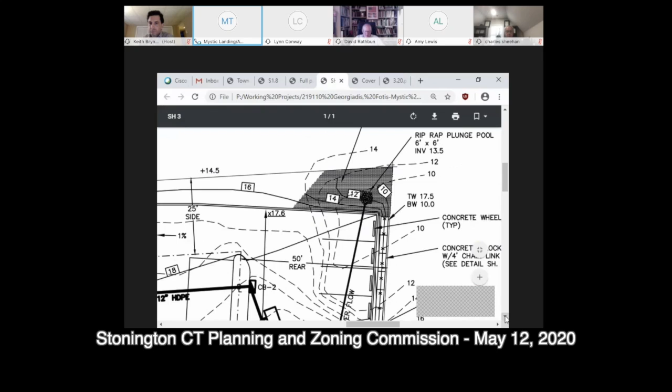A few other things I want to note about this plan is that you see there's a lot of drainage, underground drainage in different areas. All the rectangular and square areas, those are all underground drainage features. It's important to note that because when we move to our proposed plan, you will see that we've consolidated and I think have made significant improvements on the stormwater management for the site.

Furthermore, in front of the building, there was some low points where the previous plan was catching, you can see CB4 and CB5. Those are areas that we were catching stormwater in front of the building, which was not an ideal place to be consolidating water right in front of a building. Just something to note on that.

And then if you go to the left side, there's another catch basin existing that we were utilizing for an overflow, but also was catching some of the stormwater coming off of the site, which included some of the paved area in that vicinity that was not reaching any of the treatment areas for the water quality and the water quantity. So I wanted to start with this plan, and also point out that the grading on this plan was...

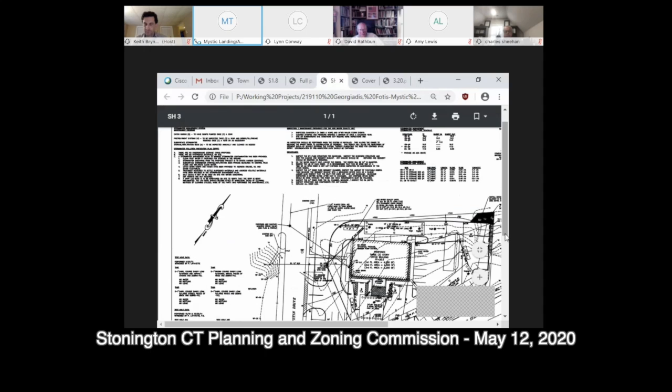A little erratic. There's a lot of steep areas, upwards of 8% along here, and I think the impetus of that was they were trying to meet the grade at Masons Island Road. As many of you know, that's much higher, or relatively higher than the site itself. The site kind of grades down as you go along Harry Austin Drive, which was a lot of the challenge in making the grading on this site work.

All of this stuff likely would have been picked up at final plan review by the town engineer. But when we first looked at this project, we went back to the old plan and said, what are the things that we need to change that can hopefully be improvements to the site?

So with that, I wanted to bring you to the new building. Generally in the same location, but I'm going to walk you through some of the changes that we made, which we feel are improvements to the site for constructability and cost effectiveness, and just general overall site improvements.

Just for the record, the project is for the construction of a 4,250 square foot, 3-story structure, 4,250 square feet in footprint. The proposed building as now is a mix of medical clinic, office space, and general office space with some common elements in foyer areas.

What we have done on this site, generally the layout is the same. We're still coming in the same general area on Harry Austin Drive. The vehicles can come across the front of the building where there's parking available, and there's also parking available to the northeast. The drive goes all the way around the building, and it's all two-way traffic with the exception of around the back, where it's only one-way traffic.

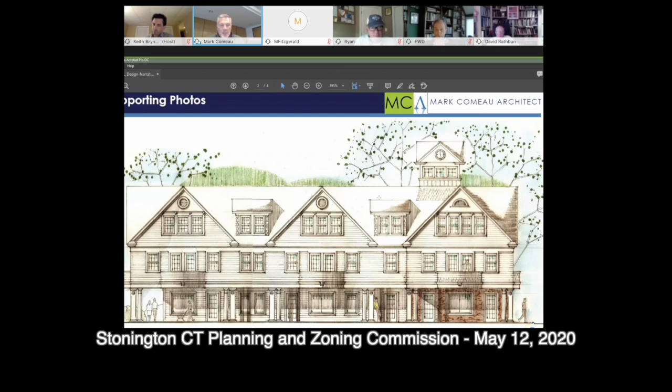I'd point out that all along the building has never maximized its FAR, and never maximized its height, which is something most clients demand of us. It was really good to be working on a project where the architecture was actually allowed to lead the way on that.

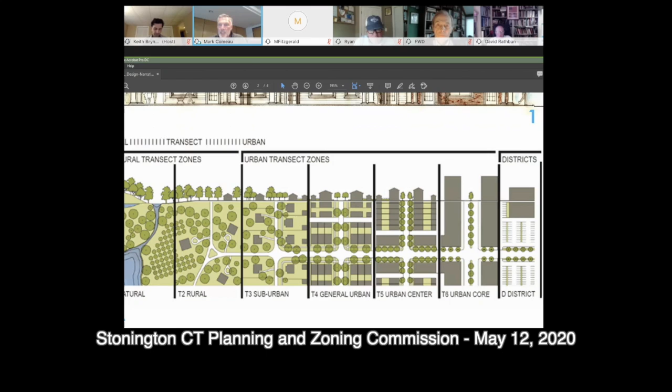This is the technical elevation of what the new design would look like. It's maintained most of its characteristics. There's undulation within the facade, some push and some pull, articulating gables to break down the mass. So it's a medium mass, but it's got residential scale to it, supported by banding lines, residential style windows, and the cupola you see is masking the code-required elevator.

This is the 3D rendering of what the structure would look like. I want to point out this is taken from a vantage point of Mason's Island Road, and you can see how the red car, the gray car, and the whitish car are mostly masked because they'd be on the other side of that retaining wall that Sergio was referring to, where we have an elevation drop there.

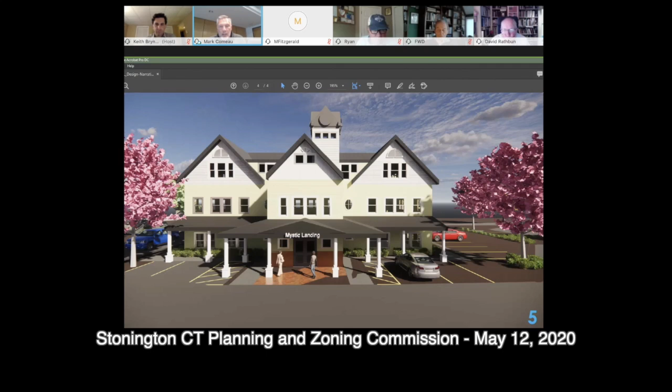The building articulates itself with a lot of movement on the facade, with the use of the portico and the roof articulation, as you can see. That color palette is the one originally conceived by me in the concept from 2008. For color design purposes, this was another three-dimensional iteration of the building from Mason's Island Road, and that's the more technical color drawing we're envisioning.

So I'll keep it short, and I'll open up to your questions if you have any for me.

I noticed on landscaping—are you doing the landscaping? There were a lot more trees on the original plan. What happened? So, to answer that question, we turned off the layer of most of the trees because they would have blocked the building. There is a vast landscape plan designed by our landscape architect, but we shut many of them off because they masked what we were trying to get across with the rendering, if that makes sense.

Can we see that before we're finished? Yep. Yes, I think you might have switched. Are you on mute now, Mark, or are you still on? I'm still on, so I'm going to unmute mine. Okay, I'll mute. Great, can you turn off your... Yeah, I'm muted, you're speaking.

This is Sergio again. The landscape plan, I believe, should be being shared if everyone can see that.

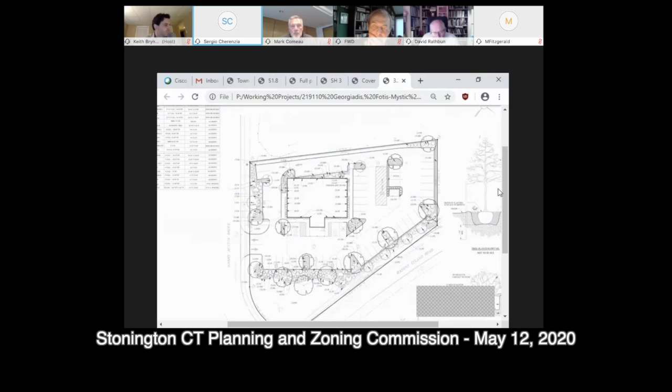Sarah, can you zoom in a little bit? To Mr. Rathbun's point, that we still are meeting the requirements for all the trees, the perimeter trees and the internal landscaping trees. We worked with landscape architect Bob Deletta, and he was the original landscape architect on the plan. So we kept that consistency as we moved through and utilized his expertise on this.

We were able to get a lot of tree screening that's going to be taking place around the perimeter of the property, especially along Mason's Island Road. In the areas where the wall won't be blocking the lights, there's a lot of low shrubbery in the southern portion, near the entrance. That's going to be pretty densely vegetated to stop any penetrating headlights, and it will also screen vehicles there. In addition, the grade still comes up a foot or two to get to Mason's Island Road, and as you go up Mason's Island Road, the grade just keeps increasing, which necessitates the wall we've been discussing.

What's the material of the wall going to look like, this retaining wall? I think Mark and I will bounce back and forth if we have any other questions. Yeah, what's the retaining wall going to look like, what's it made of? The final materials haven't been decided yet, but we can guarantee it'll be an attractive and very nice finish.

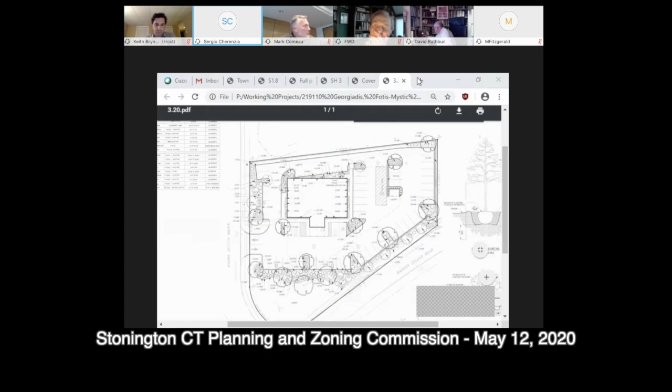But the walls won't be seen from Mason's Island Road. They'll only be seen from Harry Austin Drive and from the building itself. My client has indicated he's not going to spare any expense on this, and they'll be very attractive.

This is Lynn, I have a few questions. About the retaining wall, can you go back to the picture that Mark had up?

Thanks. So is there any kind of safety concern here that somebody could fall from the 7-foot drop? I'm saying that because children ride their bikes, people jog, there are races going on in that area, sometimes it's congested with people cheering others on. I just wonder if that's been a consideration, whether somebody could inadvertently step off. Oh, I see, okay, I didn't see that part. Boy, that's too bad, huh?

Okay, let me ask you another question. How about the lighting in the parking lot? How does that work?

Yeah, this is Sergio again. We've done a full photometric plan, so Sarah can bring up the lighting plan that was submitted in the package. I know this is kind of a muddled drawing, but if Sarah's able to zoom into it, let me see if it comes up. I think Mark, you're still sharing. Okay, I think it's switching over. Okay, so the drawing in front of you now, you can see there's a lot of little numbers, and the blue symbols are the different types of lighting we have.

You can see it's going to be relatively minimal. We've got four light posts in the parking lot, and the rest of the site will have building lights mounted to the building. All the light is full cutoff, dark sky compliant. You can see all the zeros and point ones along Mason's Island Road and Harry Austin Drive, as well as the adjacent parcel. All the lighting is designed to shine only in the areas where required for safety and security, so those lights will remain on as needed for security purposes. I know the town is very sensitive to having lights on overnight and for extended periods of time.

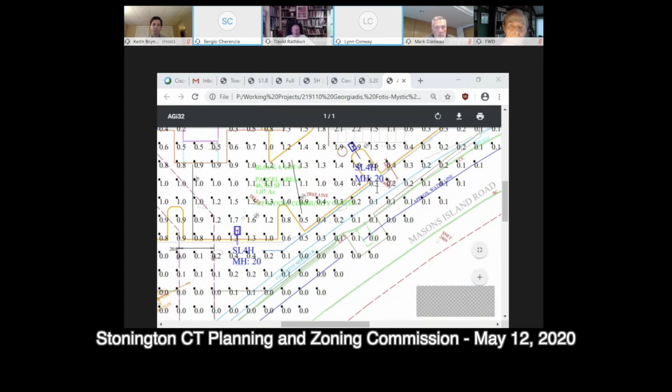Okay, let me pursue this a little bit longer. From Masons Island Road, will the light posts be seen? The top of the light posts? How tall are the light posts? I'm going to have to take a look and see how tall those poles are.

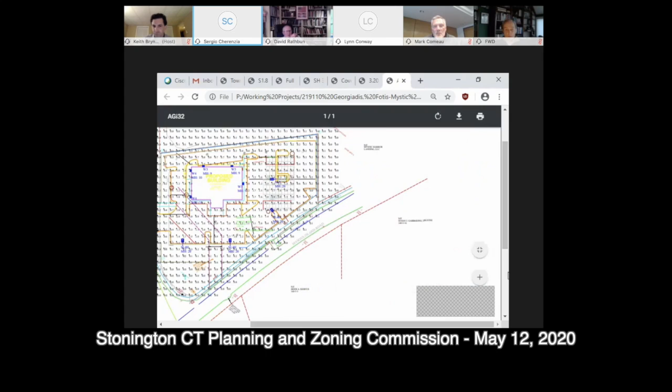Okay, and then the lights that are coming off the building, are they on the third floor? Are they coming from the third floor, from the peak of the roof, from the second floor? Where are they?

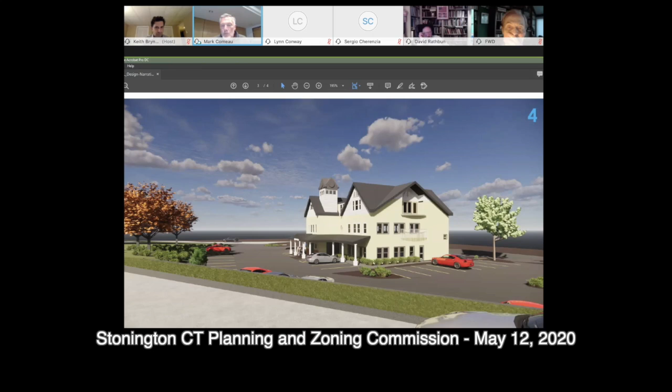Okay, I'm back in, and I'm going to try to get back to where I was. Okay. Oops. I was just up. You're up. I'm up? I can see over here. Oh, okay.

So you can see on the columns that support the portico, there's a light. I don't know if you can see my cursor. There's a light right here, there's a light right here, there's a light right here. It's all low-level lighting. There are no upper-level lights on the building.

Okay, thanks, Mark. That answered my question. Okay, yep, you're welcome. So I have another question.

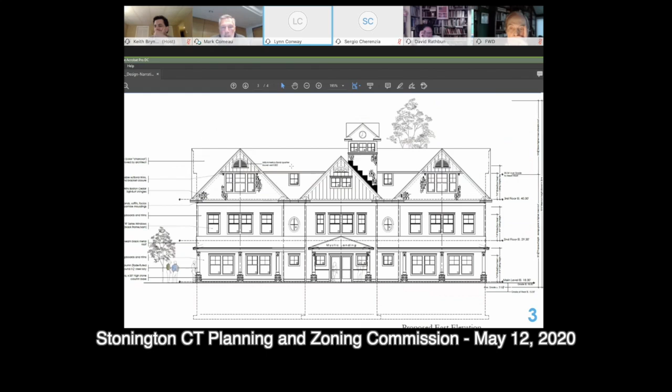The balconies on the right-hand side of the building, as I'm looking at it on the side—if you could put the next picture up right there—what's going on that third floor? Is there some kind of railing or something that cannot be seen? What's going on there? Oh yeah, there's a railing up here. Yes, and you've noticed.

Let me go back to our other ones here. That railing in the modeling ended up 11 feet off, and it should be up here. Oh, ah, okay. So it's not as if it's two balconies or something like that. That's correct.

Yep, and I'm really hoping that fence is not white as it looks like it is in the picture, Mark. Hoping you can see that black would be better. Yeah, we think if it's black it'll just die away, invisible. Okay, thank you. You're welcome.

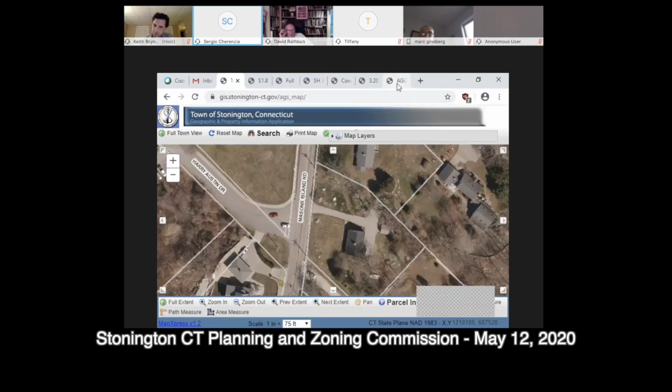And actually, the wall can't be seen from the adjacent property unless you go down Harry Austin Drive and view it from the YMCA side or the Color Lab side.

With respect to traffic, the access is in the same location. Any adjustment to it is minor, if that, from the previously approved plan.

We have also gone through a thorough vetting process. This isn't being rushed through. This has been gone through two rounds of comments with the staff engineer since the town engineer left, through your peer engineering review from another company. We provided site lighting and a sight distance study for the traffic, to prove that people coming out of this driveway have the appropriate sight distance so that they can see the oncoming traffic.

This building is not going to create any more traffic than the previously approved plan. We've thoroughly gone through traffic evaluation, and it's no more intense than the previous proposal.

So with that, I think we've accommodated additional green space. Like I said, we're going to have an attractive project with fences and walls, and we've more than accommodated the drainage. I think we've made a significant improvement to make sure that we do have the appropriate amount of green space on this site, especially along Mason's Island Road, because we were really focused on making sure that area remained attractive and nicely landscaped.

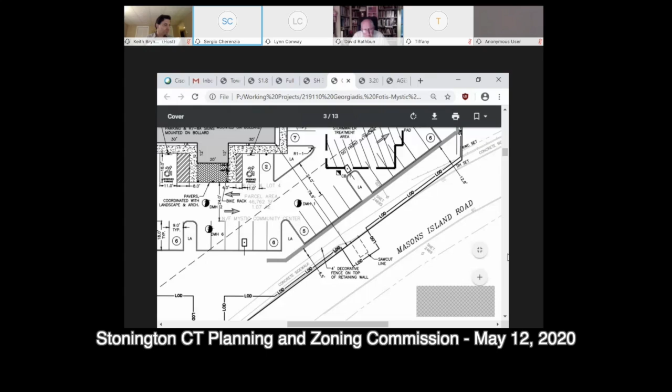Yeah, to answer your question, it varies. With the sidewalk, you're probably looking at close to 15 feet in some areas, and it'll go down to probably about 10 feet. Might have to get some exact measurements, but you're looking in that range. I think behind the sidewalk, we have anywhere from 5 to 10 feet of green space, which is what was required to get the trees and the shrubbery that we needed along the sidewalk in that area.

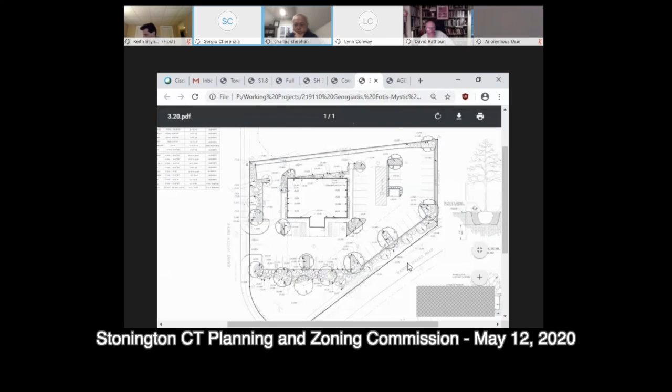And the rendering doesn't really do it justice, as Mark Comeau pointed out. We took a lot of that greenery off of there because it's going to be blocking the view more or less to the building once it's all in full bloom and full leaf out, and those trees mature. So the fence will be there for safety. It'll be decorative, but also there's going to be a significant amount of shrubbery and trees in that area to meet the local zoning code, which is going to make that a very attractive entrance into Mason's Island Road.

Yeah, okay, so it's 5 to 10 feet of some type of greenery. Okay, that's what I was looking for, just to put some perspective around it, Sergio.

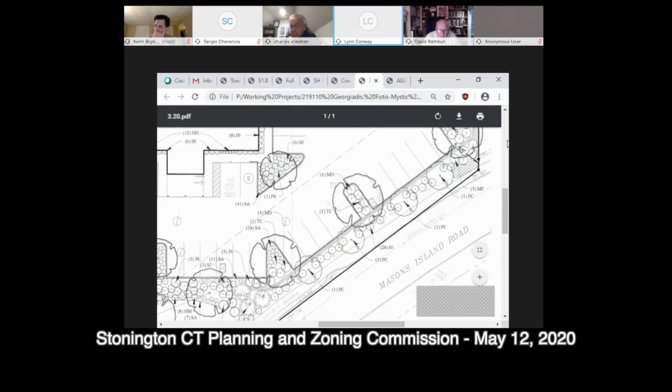And then let me ask you just one other question that came up having to do with signage. So, you know, I didn't hear you mention that at all. I might have missed it. The signage for the YMCA is not being affected at all. Is there some kind of signage for this particular building that is not on the building itself anywhere?

The signage we are deferring to a future decision. We originally had proposed some signage that would either incorporate the sign with the YMCA or work around it. In order not to bog down this application, we really want to get to building the building, and we'll come back in whatever is the commission's pleasure, or if we can do it administratively, it would be even better if we're in conformance to get a sign permit that's going to be in concert with the existing sign that's there. As Mr. Ginsburg pointed out, there is an existing sign easement that we have to abide by, and there's conditions of such on the land records. And so we fully intend to comply with that.

It's in your conditions of recommended stipulations that you acknowledge that there is a legal non-conforming sign for the YMCA that will remain. We hope that if there's going to be any change to that sign we can work with the Y, or it will remain and we'll work around it. So the long-winded answer is there is no sign proposal for this application at this time.

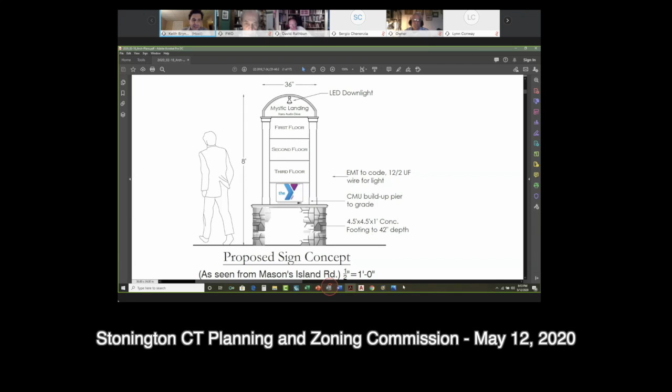Well, as was stated, back to the basics of the purpose of the application, a special use permit was required basically because they're making the building a little larger with those shed dormers. It's the interior space that's really increasing, not the size of the exterior itself. The other changes to the site are what brought this back before you.

One of the main things for you to decide is that wall issue their attorney talked about. It has been our interpretation for the past couple of years that retaining walls over 3 feet tall can't be located in building setbacks, and it's spelled out in the report. The purpose of that was to prevent negative situations of large walls being right on someone's property lines, but there have been some negative consequences of that. In some zones you have 50-foot setbacks, so to not be able to have a retaining wall over 3 feet in up to 50 feet of setbacks can be pretty problematic when you're trying to develop a site.

So to stray from that would just need your input. And if you say no to that, and if you say that a retaining wall of over 3 feet can't be in the setback, it would force some major modifications to their plan here.

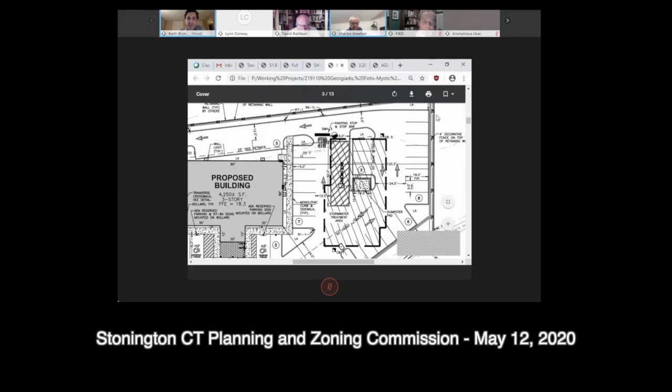Keith, my question to you also about the retaining wall, are we setting a precedent? I think it would, especially because we sort of took this interpretation upon ourselves to not allow the 3-foot walls within setbacks. So what the commission thinks does take precedence here. Now, we could have a regulation amendment in the future to clarify what we want out of retaining walls, but that would take time.

And have we asked our town attorney as to what their interpretation is of our regulations? No, we haven't asked them about it. I certainly think we should do that.

Can we make a distinction here? This is a retaining wall that is not at all visible to the neighbors. It's to keep essentially Mason's Island Road in place, so it doesn't fall into the parking lot. So that's different than putting a 12-foot wall down the property line that is visible to the neighbors. That's a distinction that I think is worth considering.

Yeah, I agree with you, Fred. I just don't want another applicant to be able to quote what has been done here. So I'm thinking of the retaining walls being built in with the new housing on Route 1 past the high school, and those very, very tall, unattractive, viewed from Route 1 by everybody who passes it, retaining walls.